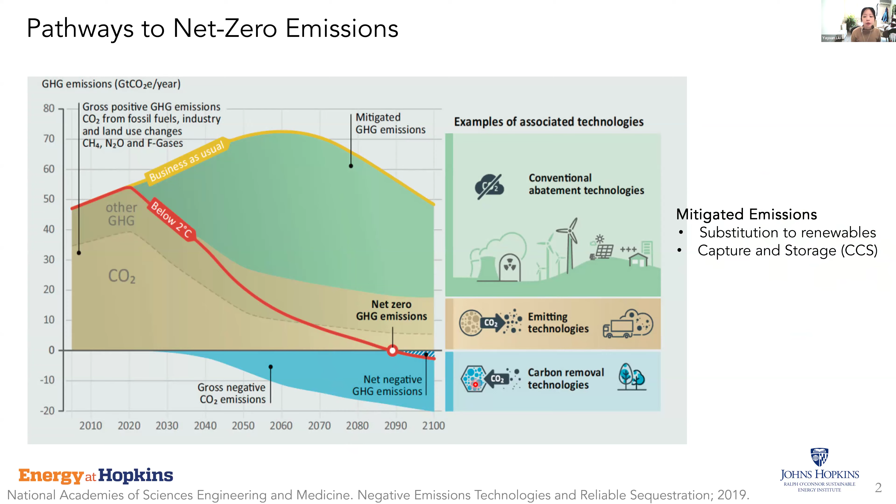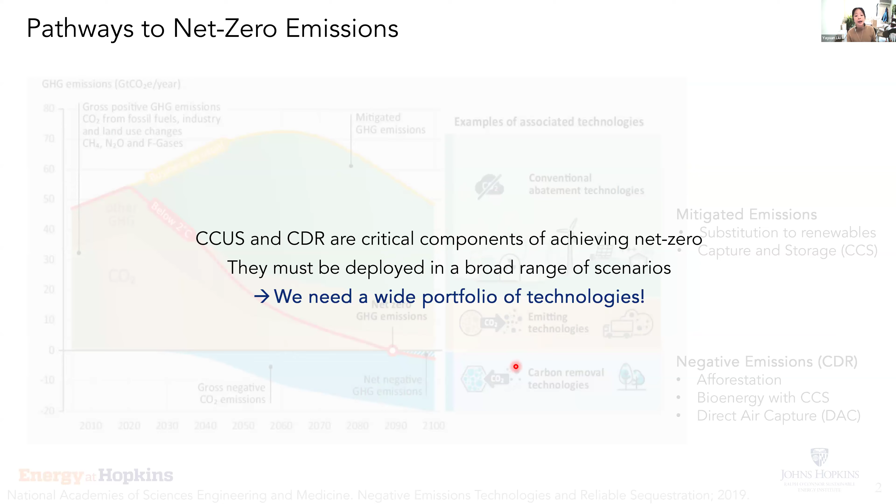But in order to achieve net zero, there's also a big need to capture CO2 directly from the environment, either through air, that's what we call direct air capture, or through ocean, to account for legacy CO2 emissions. So the overall take-home message for this kind of climate change mitigation scenario is that both capturing CO2 from stationary emitters and dilute sources are critical for achieving net zero, and there's no silver bullet technology, but instead we need a wide portfolio of different technologies in order to do that.

So with that, I wanted to jump to our main topic today, which is direct air capture. The most mature method for direct air capture is to use a bulk phase alkaline solvent. The reaction is pretty straightforward. Usually we'll use an aqueous solution of alkaline, in this case, potassium hydroxide, and then we'll send it through a large air contactor to blow air through the bulk solvent and promote the acid-base reaction between carbon dioxide and potassium hydroxide to form potassium carbonate.

And then in the incumbent thermochemical method, we'll have a pellet reactor to go through what we call the calcium looping step, where we regenerate our potassium hydroxide using calcium hydroxide. In this case, we'll form calcium carbonate as a byproduct. And in order to recycle the calcium, we'll send it through a calciner at usually 900 degrees Celsius to bake pure CO2 off and regenerate calcium hydroxide to complete the whole loop. But the challenge is that this process is really energy intensive because of this high temperature calcination step.

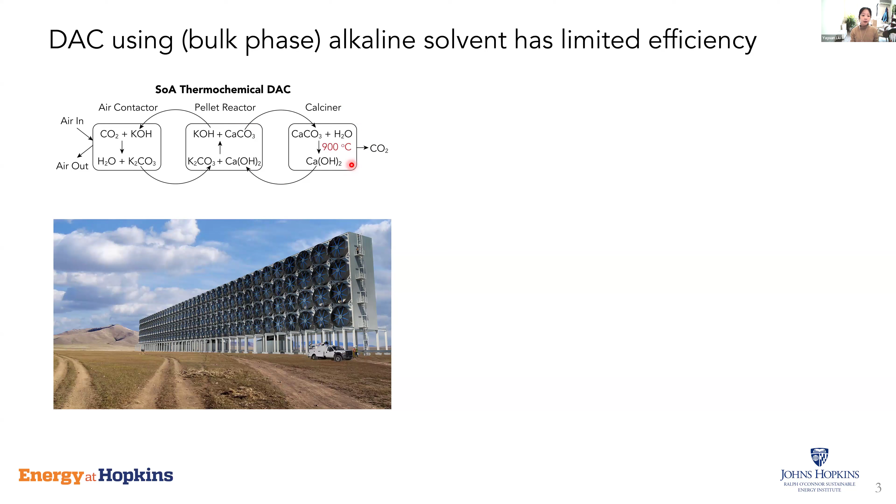And what a lot of scientists are trying to do is to replace the thermochemical method with electrochemical regeneration of potassium carbonate into potassium hydroxide. So the idea is to use an electrochemical method to generate protons, either through hydrogen oxidation or water splitting or some other equivalent method, so that the proton can react with potassium carbonate to release carbon dioxide, followed by the simultaneous generation of hydroxide to regenerate our alkaline sorbent.

Now, the challenge for the electrochemistry method is that electrochemical regeneration has no selectivity. So the proton generated can react with what we are trying to get them to react with, which is carbonate and bicarbonate, but they can also react without selectivity with hydroxide in this alkaline solution.

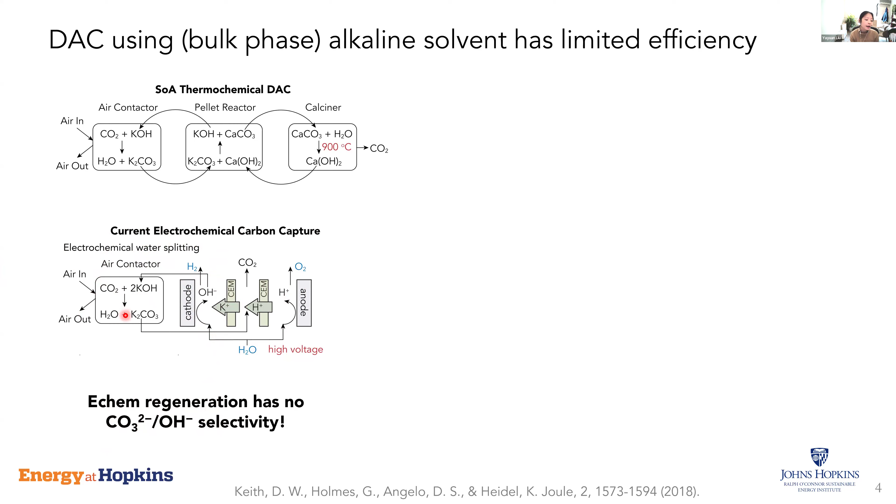So that really gives us a challenge, because bulk phase alkaline solvent in our state-of-the-art air contactor is really not very efficient. Because of the really dilute CO2 concentration in the air, the hydroxide utilization efficiency is roughly 10%. Meaning that if we send 10 hydroxide ions into our air contactor, only one of them gets to react with carbon dioxide, and the rest of them will remain as hydroxide. And that would really limit the electrochemical efficiency when it comes to regeneration.

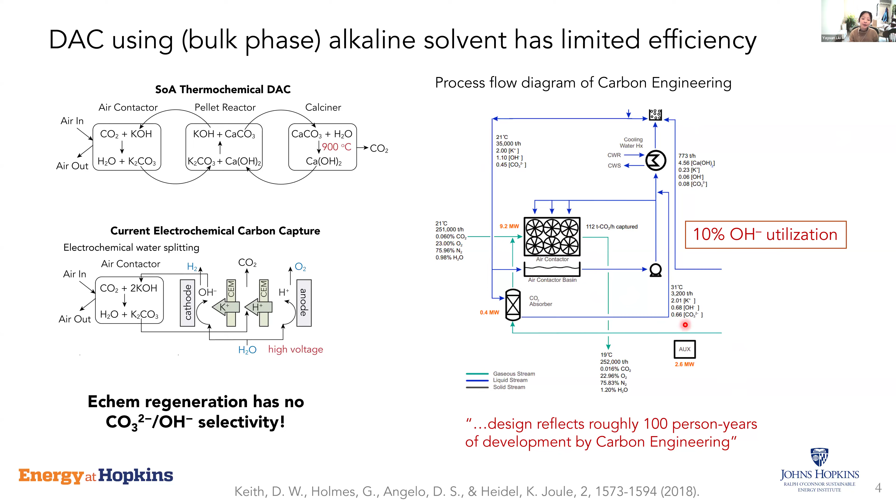One can argue that we can improve the air contactor design, but really, the incumbent technology, which is this company called Carbon Engineering, they already kind of engineering optimized their contactor after 100 person years. So there's really a limited amount that we can do. So in order to make electrochemical regeneration more effective, one solution that people are trying to explore is to use non-conventional air contactor design.

And one of our colleagues, David Sinton at the University of Toronto, has recently proposed this really elegant idea of using a crystallizer as your air contactor. Instead of using a solution-based absorption method, this design uses this kind of strand-like contactor and very concentrated KOH solution to form potassium carbonate crystals. And these crystals can be harvested as a solid and directly sent into the electrochemical reactor to get regenerated. So in this case, we are regenerating carbonate without regenerating hydroxide.

And another alternative solution is that we can redesign the electrochemical cell to eliminate the need for an air contactor to start with. And this is what we are trying to do through this research. So a little bit of an overview of our proposed working mechanism. On this side of the electrochemical reactor, which we call the DAC cathode, we're sending our air directly into the electrode through a gas diffusion layer.

So basically, we're using the abundant oxygen in the air as a source to in situ create hydroxides through the oxygen reduction reaction. So oxygen gets reduced to form hydroxide, so that we can generate a very high concentration of hydroxide at the local gas-liquid interface. And that very high local alkalinity can promote the rapid reaction between this hydroxide and carbon dioxide from air to achieve carbon capture.

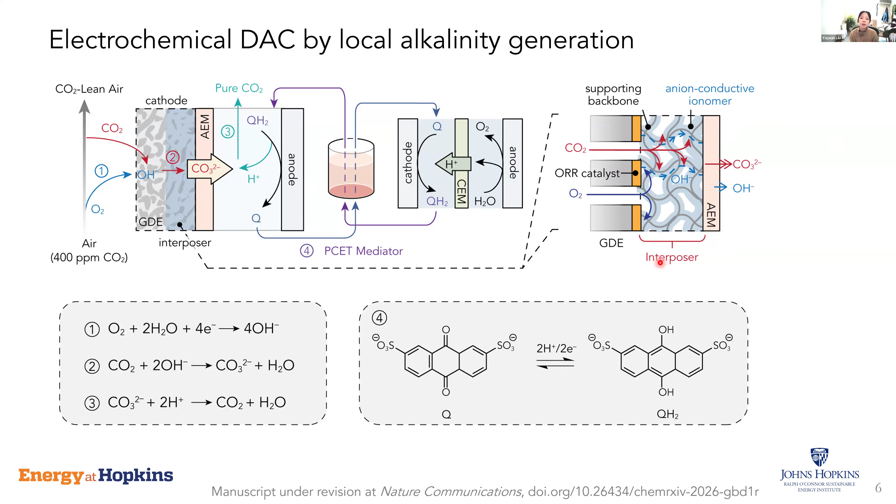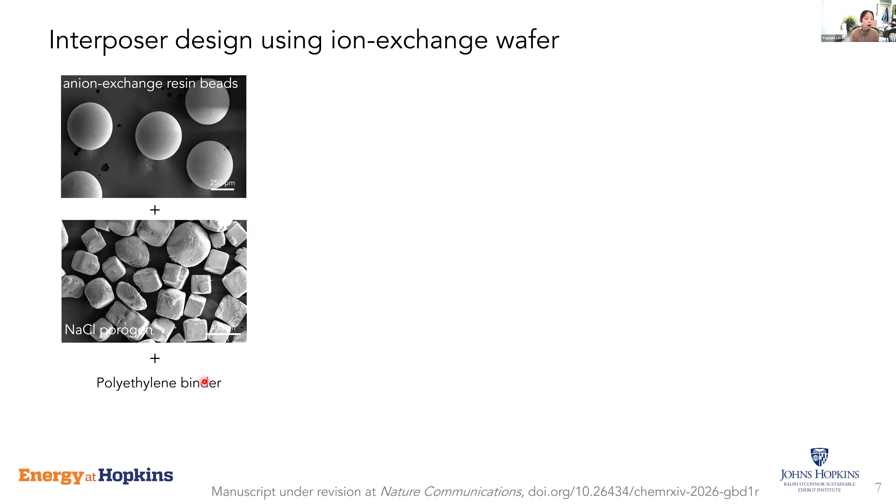You can see this kind of cubic shaped sodium chloride. And then we mix these two together, we grind them, and then we add some sort of polymeric binder to kind of glue them together. After grinding, we can put them into a plastic mold to shape them in whatever size and thickness we want, followed by thermal treatment, a quick hot press.

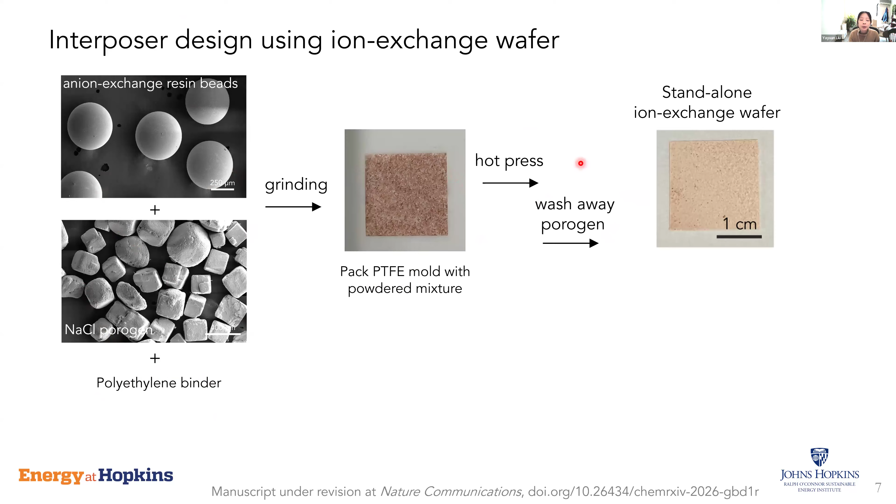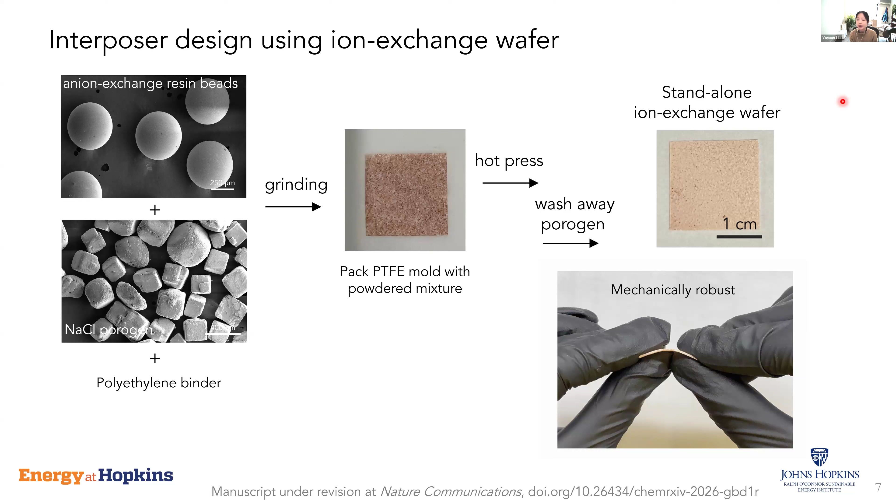And then we can put them in water and wash away the soluble sodium chloride porogen, and then we can get a standalone ion exchange wafer. And this resulting wafer is very mechanically robust. This is the student bending this wafer, showing the good mechanical stability. And the important thing is that by tuning the resin and sodium chloride porogen ratio, we can really tune the porosity very precisely in this kind of wafer.

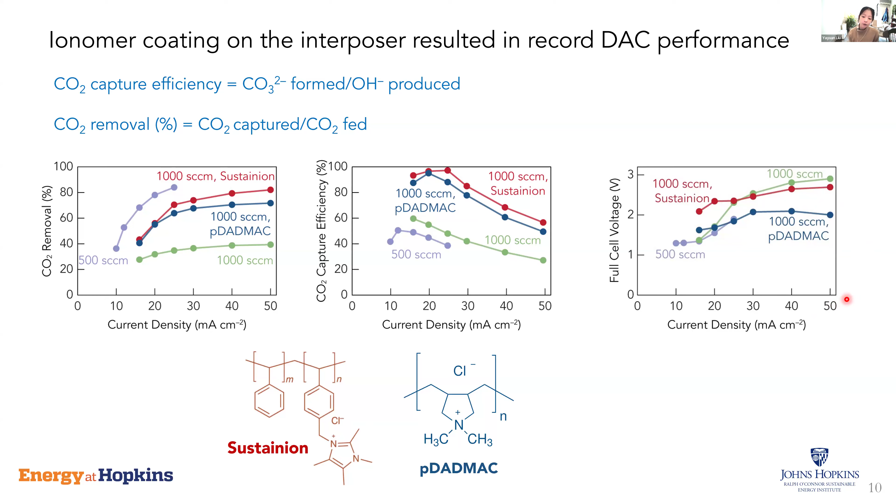As you can see, with the ionomer coating, we further promote the transport of hydroxide and carbonate in our resin wafer, in our interposer layer, and also improve the solubility of CO2 in our interposer layer. So with that, we can further improve the CO2 removal at high current and the CO2 capture efficiency, which is really promising. And another advantage of introducing this additional ionomer coating is that we can reduce the full cell voltage at higher current density, and that translates to lower voltage or lower energy input.

So with that, we want to compare our electrochemical DAC performance with existing literature. So really, we are demonstrating one of the highest CO2 capture efficiencies with current density at 1 order of magnitude higher than what's being demonstrated previously. And if you look at the energy consumption, if we pair our PCET mediator regeneration with oxygen evolution reaction, because of the higher overpotential of oxygen evolution reaction, the energy consumption is on the higher side. But alternatively, we can pair our regeneration with an alternative oxidation reaction. In this case, we're oxidizing biomass into value-added products, and that can substantially lower the energy consumption while giving us an opportunity to generate beneficial co-products.

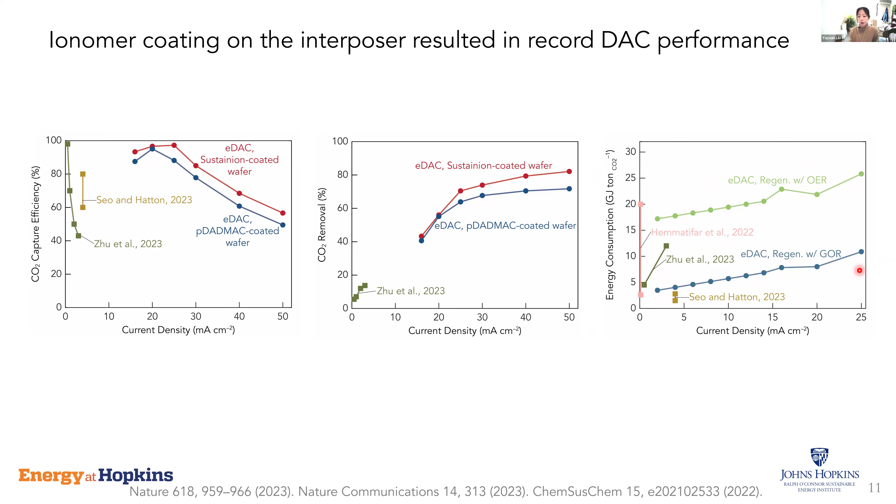And then we tested the long-term performance of our EDAC setup with a schematic shown here. And this is our device in the lab with 2 electrochemical reactors. So in one of the electrochemical reactors, we're sending air in and we're measuring the outlet CO2 concentration. So this is the DAC electrode sensor data. And on the other side of the cell, we coupled that with the PCET mediator, and we're monitoring the amount of CO2 being released through this regeneration step. So that's the mass flow meter data showing how much pure CO2 is being regenerated.

So as you can see, this is versus time, over the course of 50 hours. We demonstrated really consistent performance for our capture side. So we have a CO2 capture efficiency of about 40 and above 85% of CO2 removal, and the performance is really stable. And as you can see from the CO2 regeneration side, we're constantly generating a very stable output of CO2, with the amount released versus the amount captured being about 98%, indicating that this process is highly reversible. And we also evaluated our gas product using gas chromatography. As you can see, we only observe CO2 as the main product. There's no byproduct, so the product is really pure.

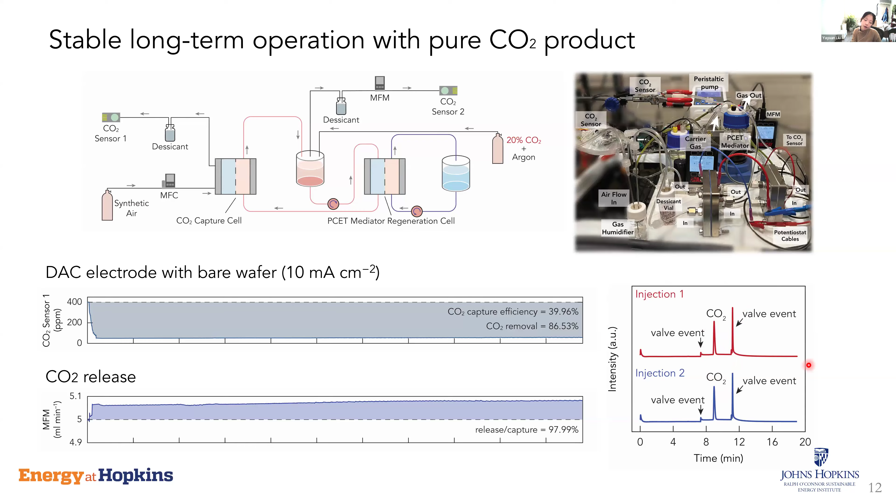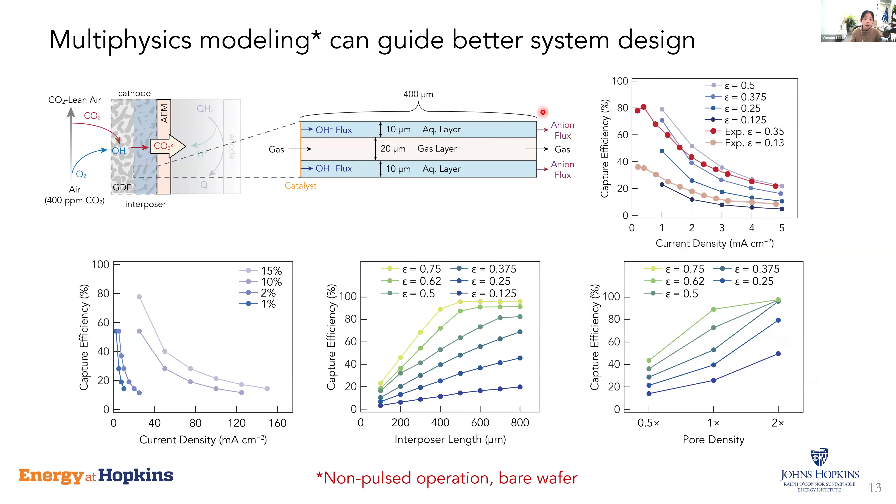And then, based on this very promising result, we also conducted a series of multi-physics modeling, trying to understand what makes a better interposer layer design. So I won't go into details, but basically there's a trade-off between the porosity of the interposer layer and the pore density and the applied current and thickness. So this kind of physics-based modeling can guide us to further improve the design of interposer material in our future work.

And we also did a sensitivity analysis of our TEA model by perturbing 20% of our input parameters. So similar to what we expected, the system is the most sensitive to the CO2 capture efficiency, and we can improve that through better material design, as well as current density and electricity cost.

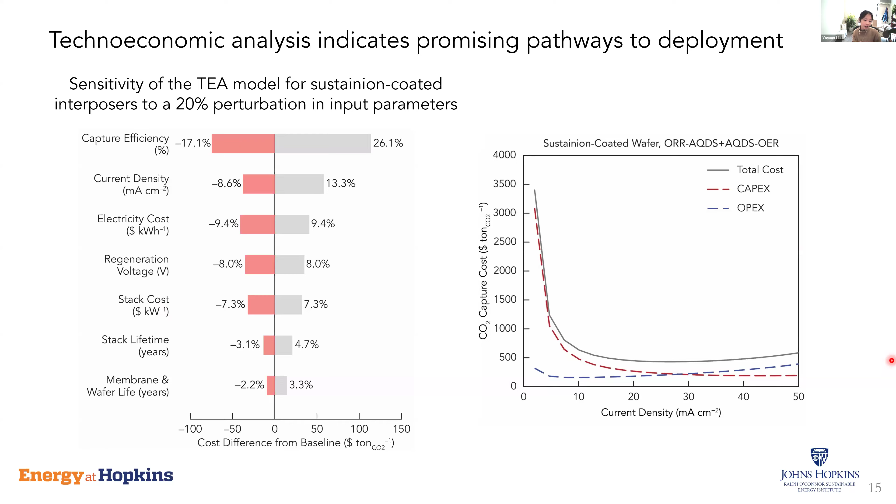So this is really promising data, but admittedly, there's a long way to go, and I look forward to hearing Jeff's perspective on electrochemical DAC technologies.

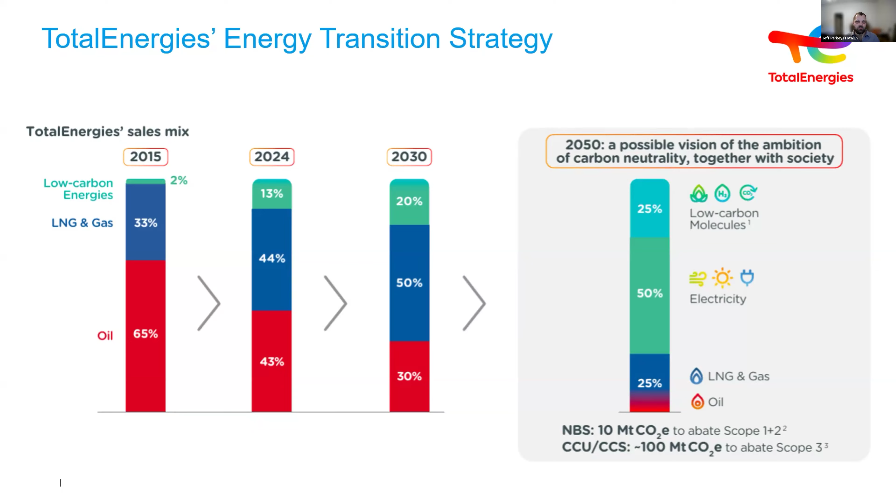And so part of this strategy is that we have a lot of assets across the world currently, right? We're talking about refineries, chemical plants, natural gas production, et cetera. So our near-term focus is decarbonizing these assets first. We're focusing on the low-hanging fruit that is the most economic: efficiency improvements, minimizing methane leaks, electrification, and capturing CO2 where it's emitted. That's typically a much lower cost than something like DAC because CO2 is much more concentrated.

So where we see DAC in this portfolio of decarbonization options is that we know we won't be able to capture 100% of all of our emissions. And so we're still going to have a lot of residual emissions left over. So we kind of see DAC as sort of mop-up duty in a lot of ways, right?

And we're going to have some assets, maybe like our offshore platforms, that are too expensive to decarbonize through other means. And so DAC for us is an important lever to truly achieve net zero. And then even longer term, DAC capturing CO2 from air, and then you can take that CO2 and convert it into synthetic fuels like synthetic aviation fuels, chemical feedstocks, and so on for more of a carbon neutral circular economy. Something we're evaluating as well.

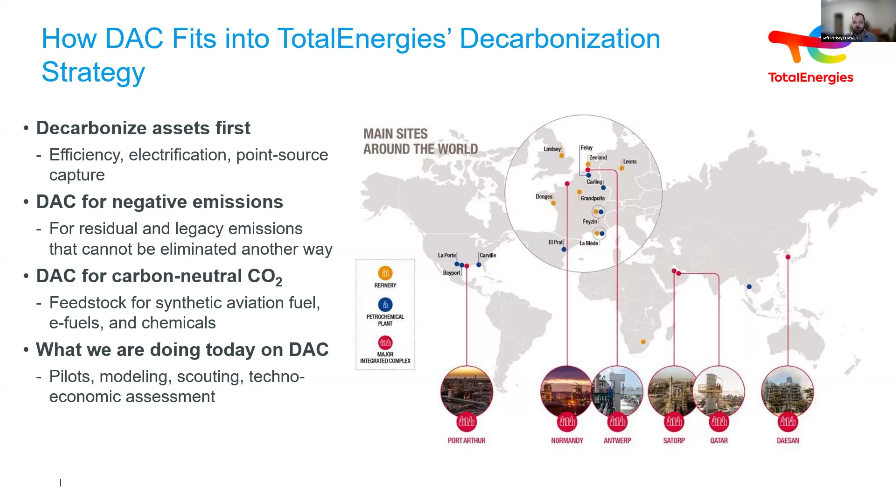I think that's more of a longer term objective. So we're heavily investing in DAC R&D at this stage. That said, we see DAC as more of a longer term technology for us, so 2040 and beyond. Of course, that's subject to change depending on advancements in technology and so on. But just to give you a perspective of how we see DAC fitting in with our decarbonization efforts.

So a big part of this as well is that even if you capture CO2 from point sources or through DAC, you need the infrastructure to store that CO2. So that's something we're heavily involved in. We've got a lot of CO2 storage projects, primarily in the North Sea and Europe, where a lot of our assets exist. But we also have a project in development in the Gulf Coast off the shore of Texas as well.

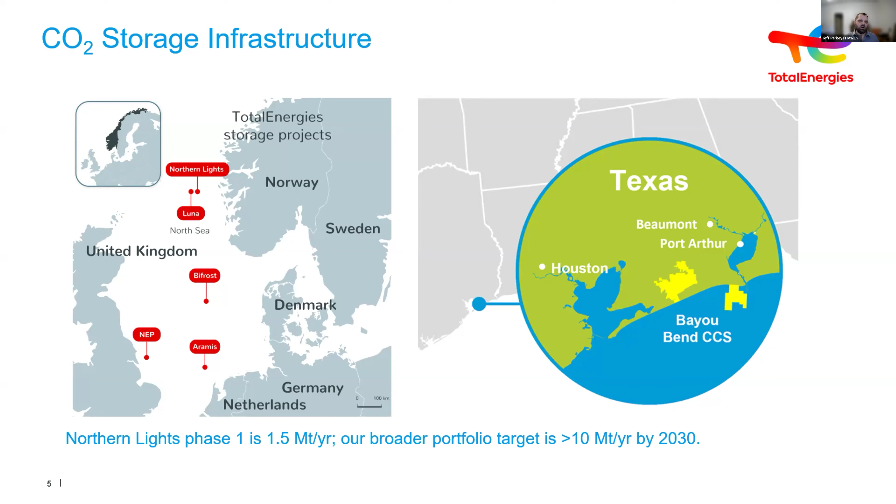So the Northern Lights project, just to give you a sense, its phase one became operational last August and can handle storage of 1.5 million tons of CO2 per year. So this is basically ship transport of CO2 from cement plants and so on. Then it goes through a pipeline, and then it gets injected very deep under the ocean into saline aquifers for permanent storage. But the point I wanted to make here is that beyond DAC, you need all the supporting infrastructure. Like you need the energy to power the DAC system. You also need a place to store the CO2 you capture.

And that means you have to move a massive amount of air to capture CO2. Depending on the capture fraction, you need to move 1.8 million cubic meters of air to capture 1 ton of CO2. Just to put that in perspective, that's like the entire air volume in a large NFL stadium, for example. And so because it's so dilute, it's always going to be energy intensive. I don't think there's any way around that. And that energy also drives cost, right?

And so what we're seeing now with the early stage pilot deployments of DAC plants is that the costs are typically in the $400 to well over $1,000 per ton range. And, of course, the earlier stage smaller pilots are definitely on the high end of that, right? And just to illustrate the gap, the U.S. has a subsidy called 45Q that pays $180 per ton. And that's a temporary subsidy. It's only good for 12 years, but it gives you a sense of how much DAC costs have to come down for it to be economic at scale.

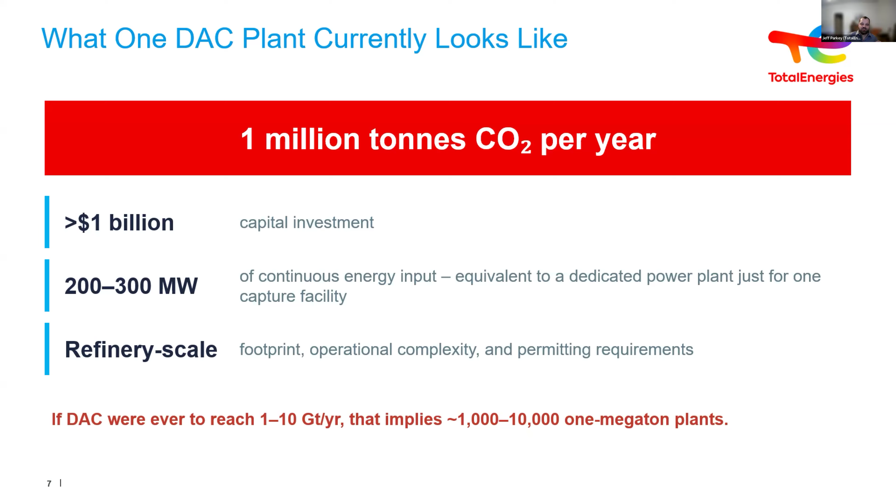So, I'm talking about how big the scale is, and I mentioned that Total Energies sees DAC as sort of a long-term thing, but I wanted to give an illustrative example of a timeline to make the point that development, like research that Yayuan's doing, is highly relevant today. And so these numbers are made up, right? But they're kind of based on a typical timeline for deploying these very large infrastructure projects.

So if you just set a very conservative target of deploying 10 million tons of DAC capacity by 2040, so we're only talking about 10 million, not gigatons or anything like that, and you work your way backwards from achieving that in 2040, it means that we have to be making investment decisions for multiple plants in the mid to late 2030s. It means our first commercial plant's got to be in the early 2030s, which means we have to have a demonstration plant in the early 2030s and pilot scale.

And eventually, we need to have a lot of work done at the lab scale pilots today, right? So it's a long-term strategy thing in terms of deploying DAC, but it is very much an urgent need to make progress today, was the main point. And from our perspective, these are massive infrastructure projects. We're talking about lots of money. And so it's really about de-risking the technology before we make those big money bets on deploying it.

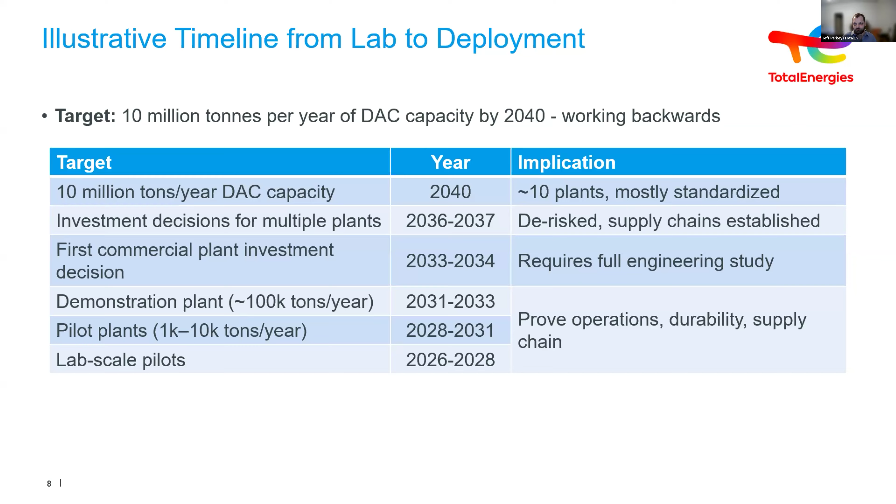So this is kind of how I see what must be true for DAC to scale. So we're talking about full commercial scale DAC. I broke it up into two different columns. On the technology side, we need breakthroughs in energy efficiency, and this is where Yayuan's work is really focused. It's possible we might be able to scale the current technologies today, but given the amount of energy you need, I think we really need a step change improvement for it to be viable long term.

Another thing to consider as well is that we need plants that have 20-year plus lifetimes. That's needed so we can amortize the capital costs, right? And so if you're going to spend $1 billion on a plant, you want it to run for a very long time, and you want it to run nearly 24/7. That way, you sort of levelize the cost of building that out over time.

And of course, you need all the manufacturing, right? If you're going to build a 1 million ton scale DAC plant, you have to have all the materials, the supply chain, all that worked out. And so academia and startups are really focused on the technology column. And where companies like Total and other industry companies really can help is on the deployment side. I already mentioned that one of the key bottlenecks is having a place to put the CO2 that you capture. Obviously, we're working on building out that infrastructure for transport and storage.

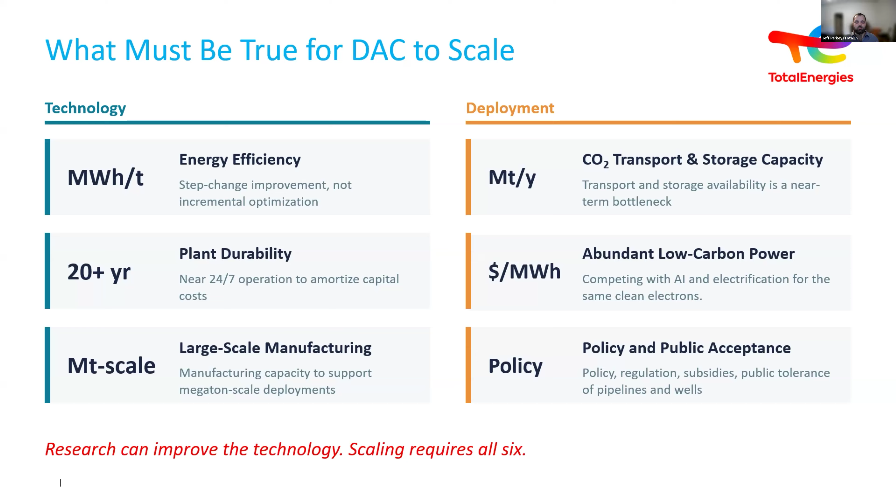And the other aspect is public acceptance, right? Most likely we need pipelines, which most people do not want in their backyards. So that's another important aspect that has to be overcome. So the point is that the research is critical for improving the technology, but scaling this up really has to address all these different aspects.

So electrochemical. So yeah, we sponsored the research project with Yayuan. Electrochemical is a very attractive approach for doing DAC, right? And so we're still looking for those breakthroughs in energy efficiency and stuff that we think is needed for large scale long-term deployment. And so, a lot of the current methods that people use for DAC are thermal based. There's a lot of thermal losses and stuff.

Electrochemical allows you to take electricity kind of directly to the CO2 capture and release mechanisms. And so it has a potential to be a lot more energy efficient. And of course, you can envision a system that is all powered by green electricity, operating off of solar or wind, and could be long term a much more elegant way of solving the DAC scaling problem.